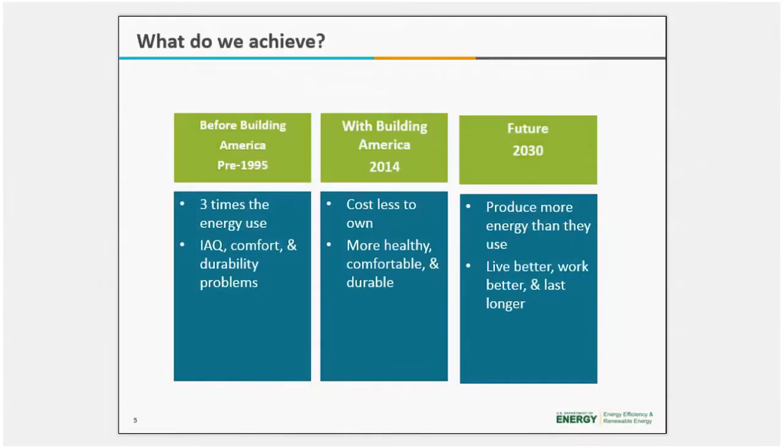With that, we look at where we've been and where we're going. For example, in 1995, a home used about 3 times more energy per square foot compared to today, and indoor air quality, comfort, and durability problems were common back then. But today, a home built to DOE Zero Energy Ready Home specifications uses less than half that energy and is more comfortable, healthy, and durable.

By 2030, though, what does the future hold? Building America will demonstrate that new and existing homes can produce more energy than they use. That is the goal.

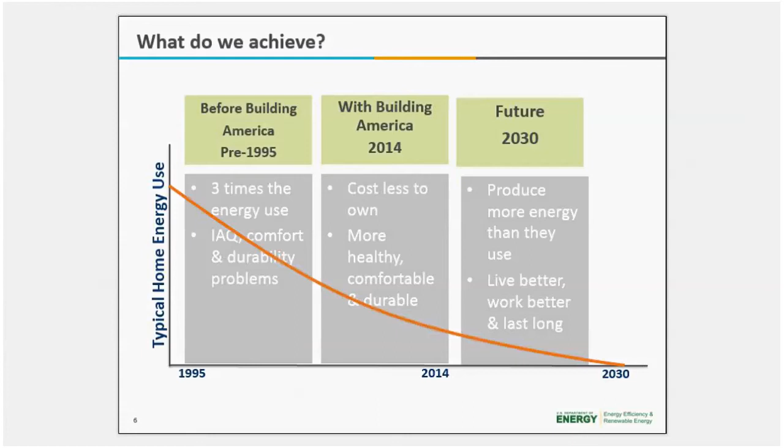So with window retrofit opportunities, it's probably not a mystery to anyone on the line that windows are a major source of heating losses. We know this, and the gains in the building can significantly drive up residential energy bills. Despite this fact, approximately 40% of U.S. homes still have single-pane windows, which are inherently inefficient and poor insulators. We have several case studies that have shown this. The presence of single-pane windows in homes has persisted over the past 2 decades, and despite the fact that approximately 30 million windows are replaced each year with higher-performing insulated windows, a large percentage of the double-pane windows replacing them are not higher-performing low-E windows, but are made of clear glass. Thus there is a tremendous opportunity here for technologies that improve existing windows' performance, such as low-E storm windows, to provide energy savings to a large segment of residences, most of which accommodate moderate and low-income households.

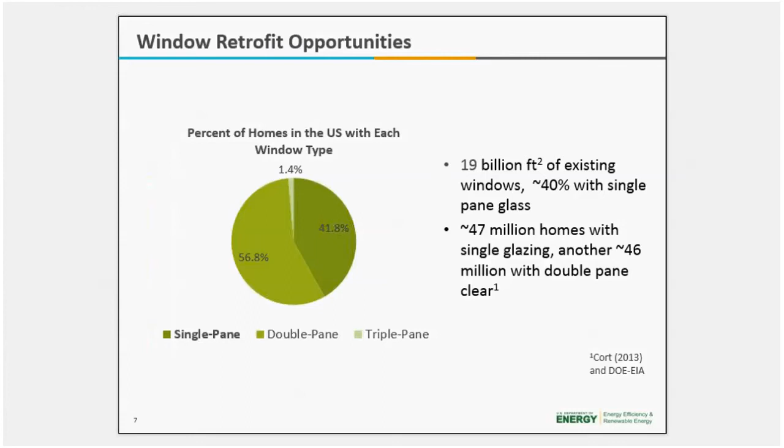So cost-effective window retrofits, that's always the big question. Are they cost-effective? DOE has been supporting technology development, market assessments, and early deployment activities of low-E storm windows, including a recent climate-based modeling effort to determine where and what types of low-E storm windows are cost-effective throughout the U.S. The results are pretty impressive, demonstrating significant savings across a wide range of climate conditions, which can be achieved cost-effectively in most regions throughout the U.S., as shown here in the climate zone map. Tom Culp is our first presenter, and he'll talk in more detail about some of these climate-based modeling results.

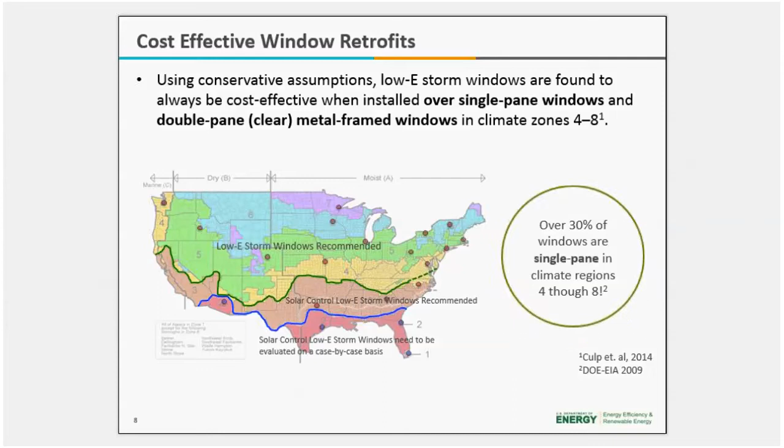So, a new look at low-E storms inside and out. Considering the amount of energy lost through windows of existing homes each year, this is definitely a remodeling retrofit area, and there is a need for a solution.

Although there are many good window replacement technologies available to homeowners, window replacement is simply not an option for many homeowners, for a number of reasons including cost and affordability, as well as aesthetic reasons for some homeowners who want to preserve the historic look of the home.

So one of the points we'd like to emphasize during this webinar is that storm windows have evolved through the years. There are a lot of people who have an idea about what a storm window is, but these ideas may very well be dated, especially the look of them.

Modern storm windows are not your grandmother's storm windows anymore, which had to be installed and removed every season, and had to be cleaned almost monthly.

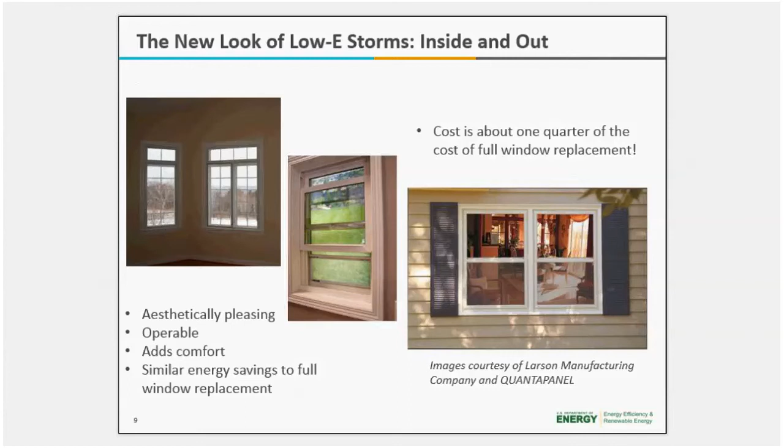Modern storm windows and interior panels are designed to blend in with the existing architecture, be permanently mounted, and are available as both a fixed and operable window. The photo on the left, the interior low-E panel, both fixed and operable, shows this. And the photo on the right shows an operable exterior low-E storm, which also includes an insect screen.

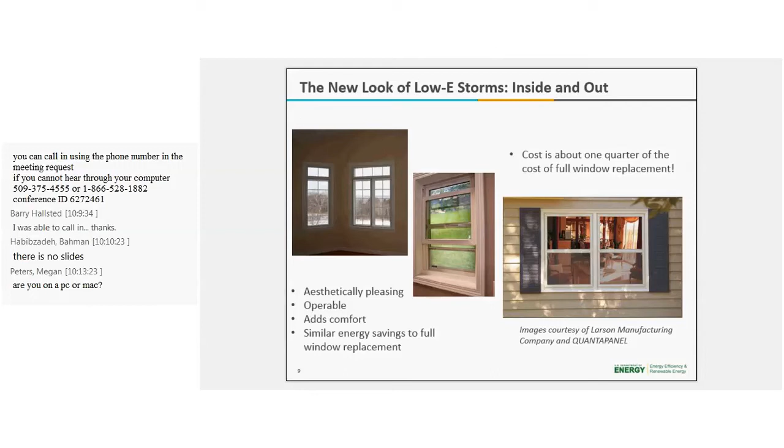So let me get into the actual presentation, and I'm going to introduce Tom Culp, who has been working with various programs in low-E storm windows for over 8 years now. He headed a DOE-funded research project from 2009 to 2013 to demonstrate, through residential and commercial case studies, the ability for low-E storm windows and retrofit panels to cost-effectively reduce energy costs in existing buildings.

He's the owner of Birch Point Consulting, and he'll be providing an overview of the technology for today's webinar: how it was developed, how it works, and he'll tell us about the field tests, case studies, and other research deployment efforts related to low-E storms. So, Tom, I'm going to let you go ahead and take it away.

All right, thanks, Pam. Hopefully you can hear me okay.

Yeah, so the technology in low-E storm windows has really been under development for almost 15 years now, and it initially started through the Emerging Technologies program at DOE. DOE supported the national labs to do a lot of testing of the initial concept, starting off with lab testing, going up to some demonstration field case studies, and I'll be talking about some of those areas.

After this technology graduated from the Emerging Technologies program, it was passed to the Building America program for in-field testing and installation guidance development, and now multiple groups are working on market transformation to make the broader building, energy efficiency, and utility communities aware of the benefits and opportunity for this technology.

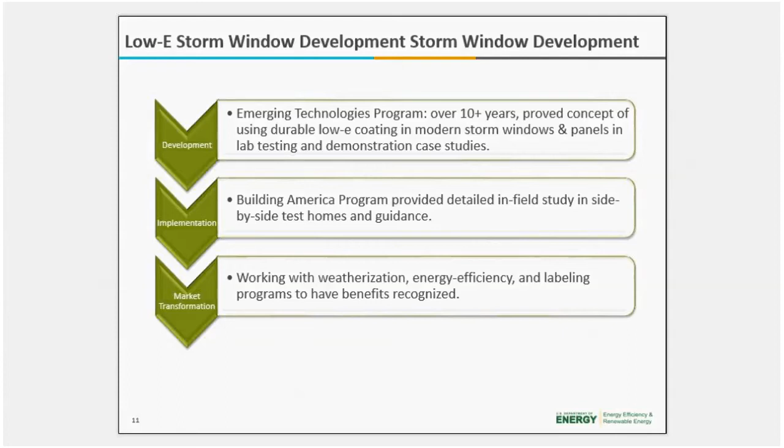But I'll start off talking about the initial concept behind low-E storm windows and some of the testing that has gone into its development.

So really, back in the 90s, Lawrence Berkeley National Lab, LBNL, first suggested this concept that a durable low-E glass coating that you would normally think about in a new window could be incorporated into modern storm window designs to create a cost-effective insulating and sealing measure for existing windows.

So really, you don't necessarily think about this as a separate window. Think of it as a way, a measure, or a tool to improve your existing window.

Now, of course, if your existing window is degraded and needs replacement, then you should replace it with the best window possible. But practically speaking, this is not an option for many home and building owners, either because of cost, historic preservation concerns, or that the existing window is fine and simply does not need to be replaced, but you still want to upgrade its performance. In that case, low-E storm windows and panels are an ideal choice to upgrade your existing windows at a much lower cost.

And it really does this in three different ways. First, it provides air sealing of the primary window. I'll talk about some case studies that have shown a 10% reduction in overall home air leakage when you add a storm window. That's not just the window itself, that's the overall home, because particularly in many of these older existing homes, and particularly with single-glazed windows, that's a primary leakage point. So addressing that area can have a significant impact.

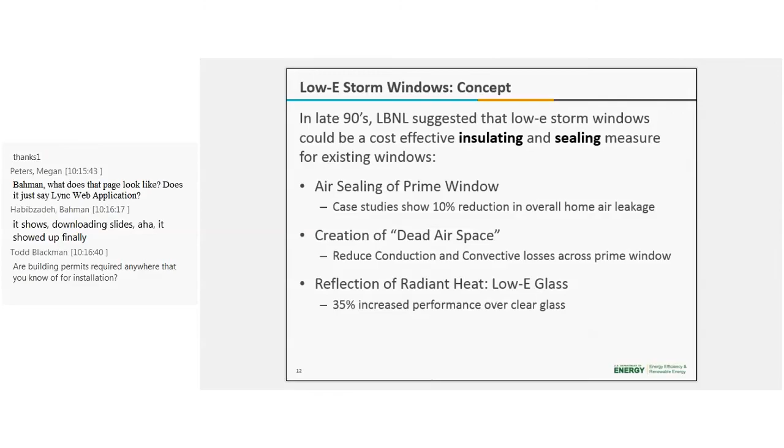Next, a low-E storm window creates a dead airspace that reduces conduction and convective heat losses across the primary window. And then third, the low-E glass reflects the radiant heat back into the home, so it reduces radiant heat loss, just as it would in the same way that low-E glass outperforms regular glass in a new window.

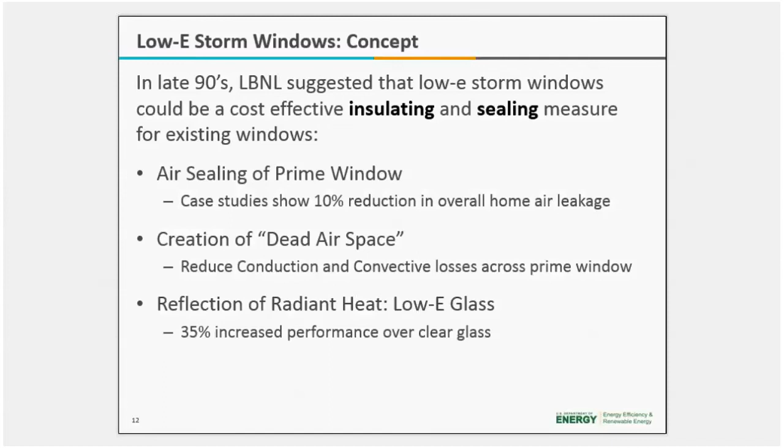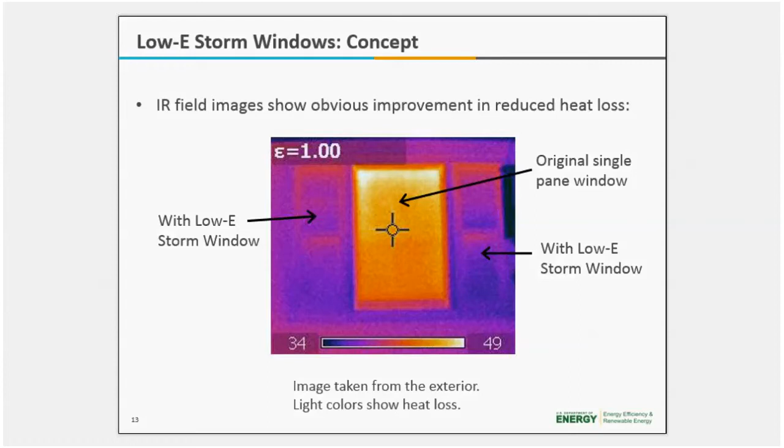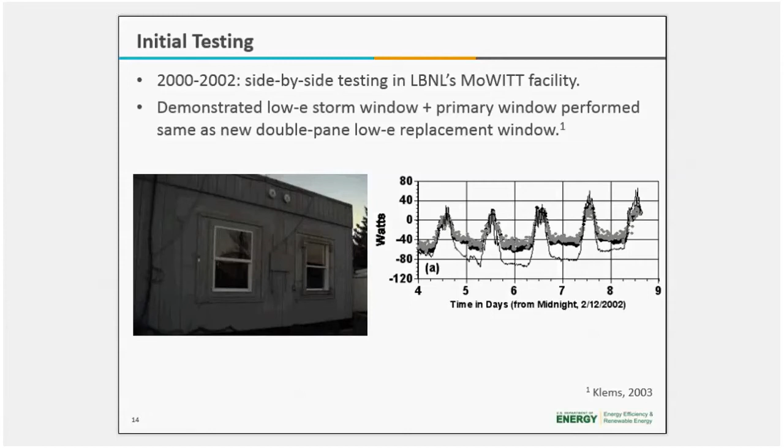Going through a bit of history: first in 2000 to 2002, Lawrence Berkeley National Lab used their mobile window test facility, or MoWITT facility, to do side-by-side detailed testing of different window options. There's more detail in this study from Joe Klems, but basically they demonstrated that a low-E storm window plus a single-pane primary window performed essentially the same as a new double-pane low-E replacement window.

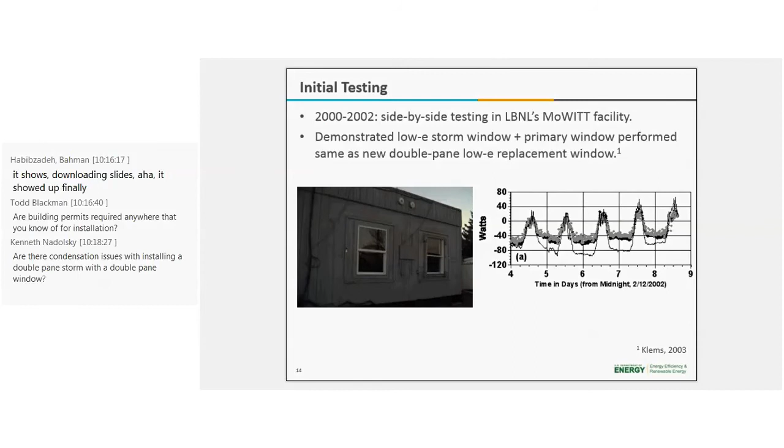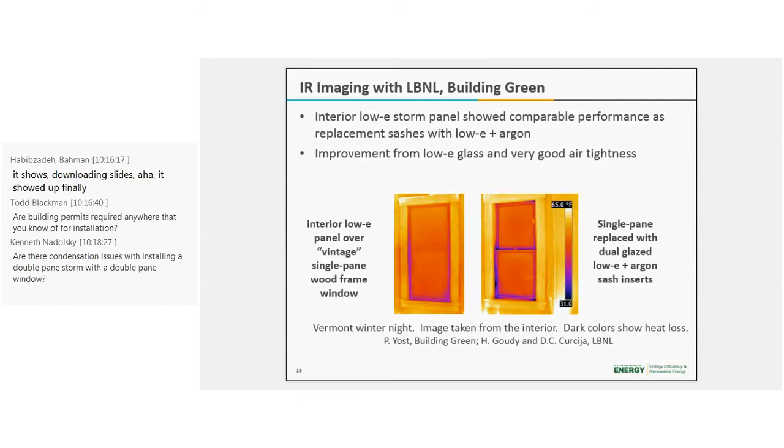Later on, LBNL did work with Building Green, Peter Yost's group in Vermont, doing infrared imaging. This slide shows a Vermont winter night image taken from the interior, where dark colors show heat loss and bright colors show more insulating performance. On the left, you see an interior low-E panel over a vintage single-pane wood frame window, and on the right, the single-pane sashes were replaced with dual-glazed low-E argon sash inserts. Visually, they perform similarly in terms of heat loss.

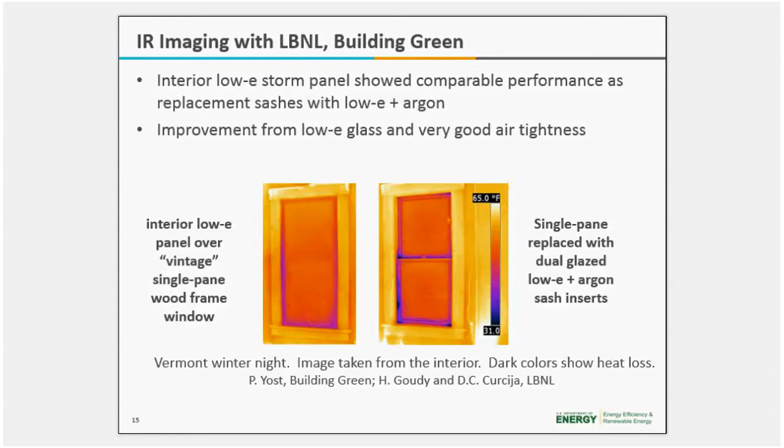So the concept, both in lab testing, looks quite positive that we can get significant improvement in performance by using both interior and exterior panels.

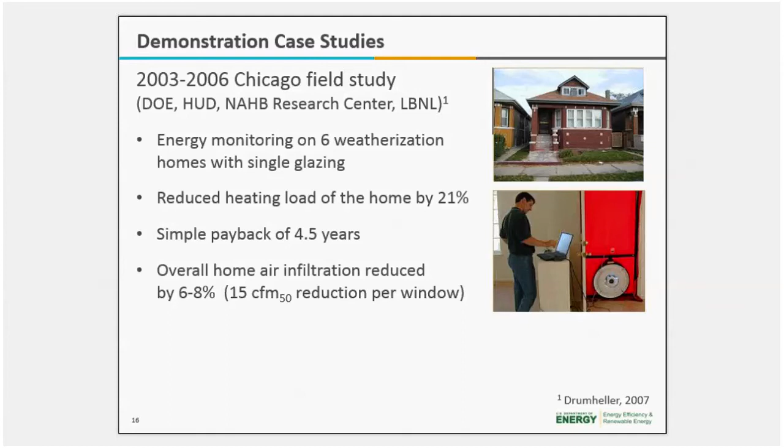Of course, in replacement windows, the payback period is considerably longer than that. Additionally, when doing blower door tests, the overall home air leakage was reduced by about 7%. That's for the overall home, not just the window, so that's actually fairly significant.

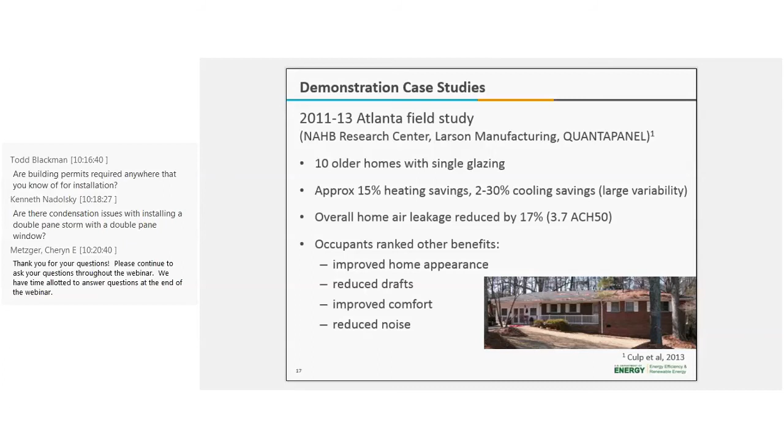Chicago is obviously a very cold climate, so we wanted to do a similar study in a more mixed climate. I participated in a DOE-funded study between 2011 and 2013, again with the NAHB Research Center as well as Larson Manufacturing and Quantapanel, where we took 10 older homes in the Atlanta area with single glazing and tested different storm window technologies.

The low-E storm windows showed over a 2-year period approximately 15% heating savings, as well as 2 to 30% cooling savings. There's large variability, particularly on the cooling side, because these are real-life field studies with variations between homes, the amount of trees around them, and real people living in them—these are occupied homes, so there's a lot of variability, but very positive results overall on both the heating and cooling side.

A little bit later on, Sarah Widder from PNNL will talk about the test studies done in the PNNL test homes, which are a more controlled environment.

On the air leakage standpoint, these homes and single-pane windows were particularly leaky, so by adding the storm windows we were able to reduce overall home air leakage by 17% just by introducing these modern-style low-E storm windows.

In addition to energy efficiency, we also polled occupants on other benefits, and they ranked these higher than energy efficiency because they're what you notice when living in the home. The number one benefit cited was improved home appearance. As Pam was saying, these aren't your grandmother's old storm windows that have to be taken off seasonally and are old and clunky—these are designed to be aesthetically pleasing, fit in with the architecture, and improve the curb appeal and dress up these old existing windows.

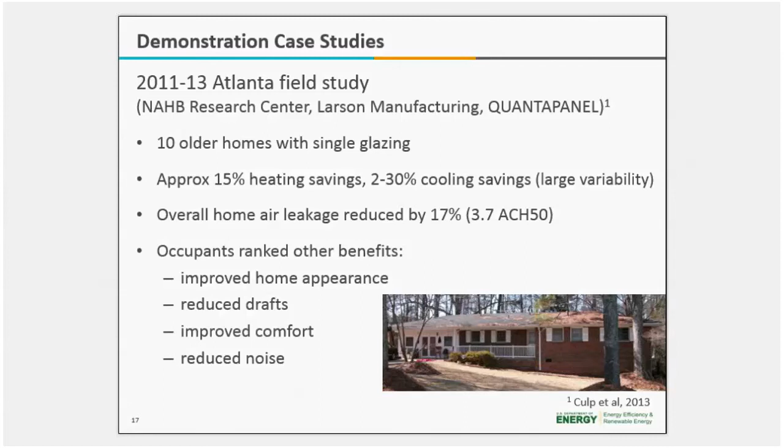In addition to single-family homes, we also wanted to test out low-E storm windows in multifamily buildings. Part of this same research study with NAHB Research Center, Quantapanel, and Larson Manufacturing, we took two older, 50-year-old large apartment buildings in the Philadelphia area. Just one of the two buildings is shown here. They're both identical, 101 apartments overall.

These had single-pane metal windows that already had old clear storm windows, but they were really poor quality, so we replaced the old clear storm windows with new modern low-E storm windows. Just by replacing those, over a year period we saw 18 to 22% reduced heating energy use, as well as 9% reduced cooling energy use, so very significant.

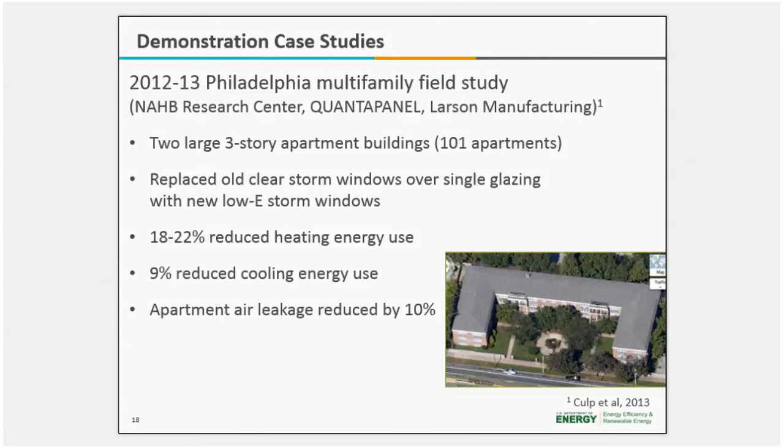We also did air leakage testing on select apartments and showed that apartment air leakage was reduced by 10%, which is consistent with the other studies. So very positive results in both single-family homes and apartment buildings.

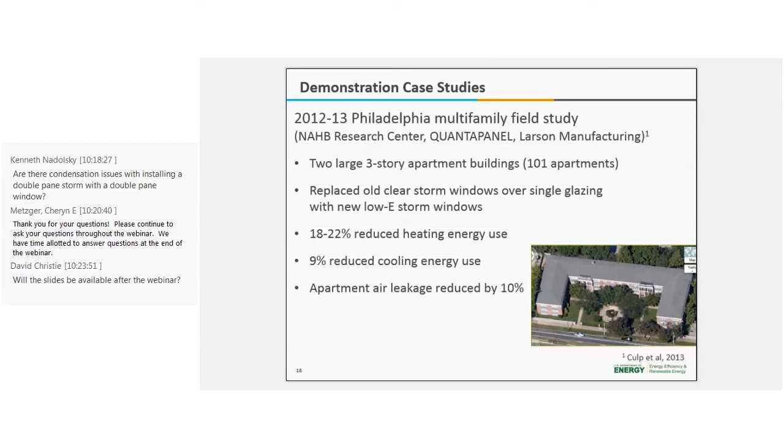I did want to mention, though, that low-E storm windows and panels are not just for low-income weatherization homes. Obviously that's one of the first targets, but they're really appropriate and a good window retrofit option in almost any building type where it's either impractical, too expensive, or undesirable to replace the existing windows. Of course, if you're going to replace the windows, put in as good of a window as you can, but in many cases it's just not practical or cost-effective to do so. In that case, low-E storm windows are a very good option.

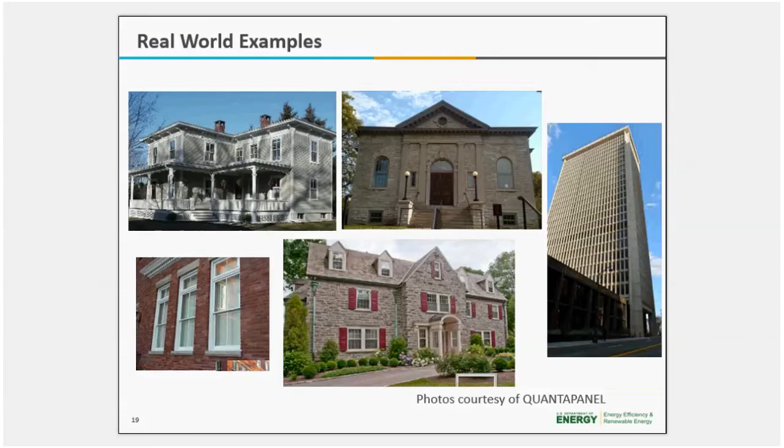As shown here on this slide, this includes homes of all types, historic buildings, light commercial buildings, and even large buildings. All the pictures here show real-life examples where either low-E exterior or low-E interior panels are being used.

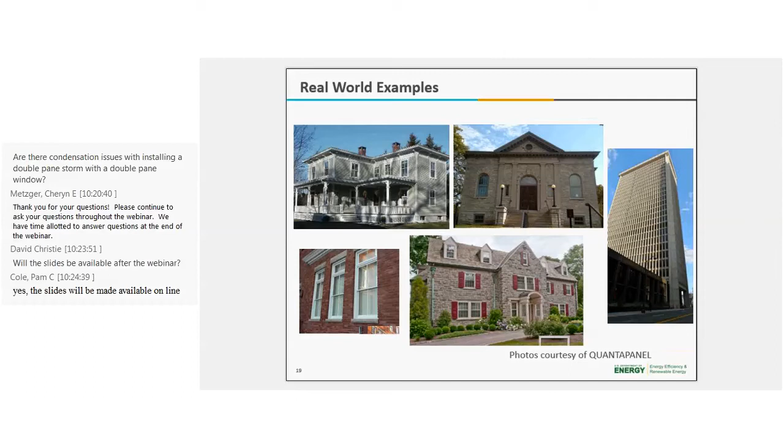Although they're really applicable to almost any building type, one of the first targets when we started to look at this is weatherization, both official government weatherization programs, but also the general weatherization market for upgrading existing homes. So back in 2009, the ability to include low-E storm windows was added to NEAT, the National Energy Audit Tool, and weatherization assistance software, used by many state weatherization programs.

Then the following year, with DOE support, low-E storm windows were added to Pennsylvania's weatherization measure priority list for single-family homes. This was the result of a needs analysis for 37 home types, covering all different home types in 4 different cities across Pennsylvania to cover the different subclimate zones.

In this case, the key output we're looking at is the SIR, or savings to investment ratio. Under weatherization programs, the SIR must be greater than 1 to qualify for that program. When we did the needs analysis, the SIR was between 1.4 to 2.2 for low-E storm windows over single-pane windows, and it ranged from 1.3 to 2.1 over metal frame dual pane windows.

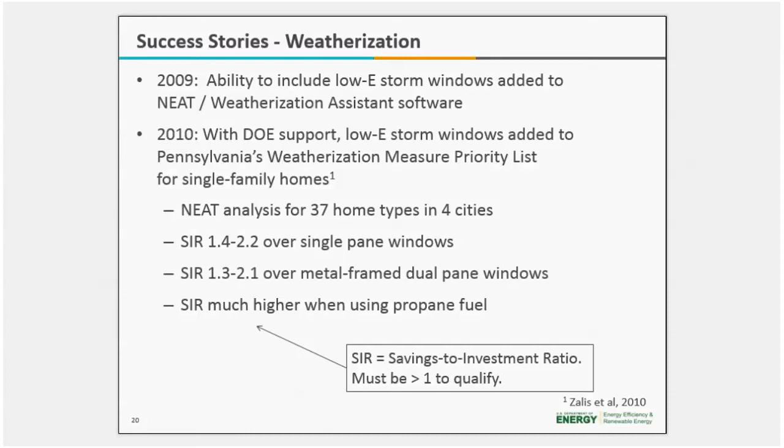The main study was done for natural gas heated homes, but when you use either propane fuel or electrical resistance heating, then the SIR was much higher than this even. So in all cases, it was proven to be cost-effective for the weatherization program in Pennsylvania, and they added it to their weatherization measure priority list.

So we wanted to, together with PNNL, expand upon this, what was done in Pennsylvania, to do a similar type analysis but for the entire country. We expanded this NEAT analysis using 39 different home types in 22 cities across all 8 climate zones that cover the continental U.S. There's a lot that went into this study.

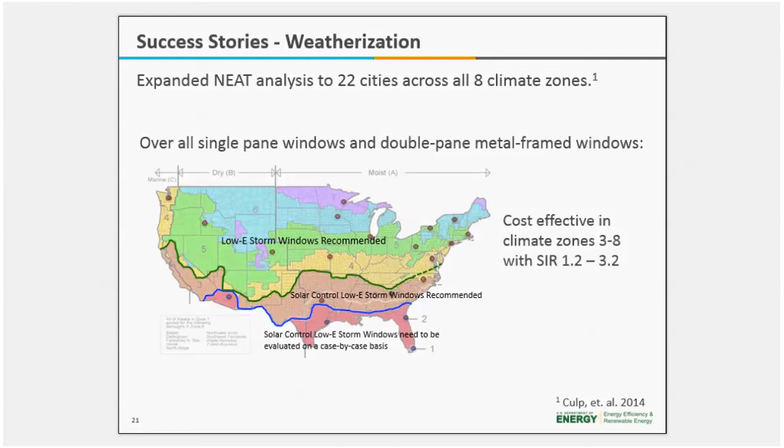We also did the test over double-pane wood or vinyl frame windows, where adding a low-E storm window or panel would then turn it into a triple low-E unit, basically. This was shown to be cost-effective in climate zones 6 through 8, as well as the eastern part of zone 5, which has higher heating fuel costs, such as Pennsylvania and New York. In this case, the savings to investment ratio, or SIR, ranged from 1.1 to 1.9.

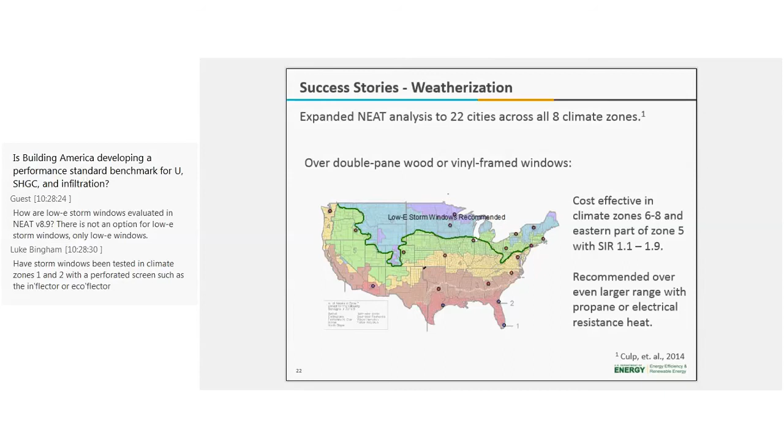And again, this was for natural gas heating, and if you do it with propane or electrical resistance heating, then they're recommended over a much larger range because those are higher cost fuels.

So taking these really positive results, both the field studies and some of the weatherization and climate-based modeling we did, one group we're working with now is the Consortium for Energy Efficiency, or CEE, which includes a lot of utilities and energy efficiency program administrators. They have formed a Windows working group together between CEE members as well as industry stakeholders to see how we can advance the uptake of efficient fenestration products across the U.S. and Canada, both efficient new and replacement windows as well as window attachments such as low-E storm windows.

One of the first outcomes of this group was the CEE window product overviews, published in February as a resource for CEE members and energy efficient program managers, that goes into detail about each of the options and technologies for addressing windows in a utility or energy saving program.

And then the next step, there's currently a couple different working groups. There's one Windows attachment subgroup that includes low-E storm windows, and in fact our next meeting will be in Salt Lake City as part of their industry partnership meetings, September 17th and 18th.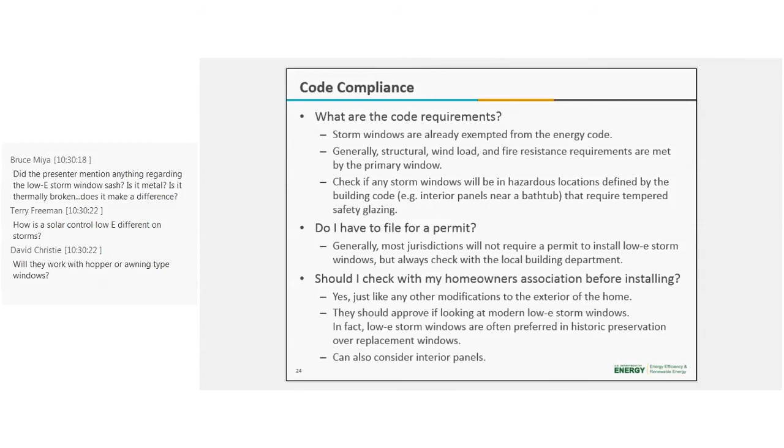Now, in general, for the energy code, storm windows are already specifically exempted from the energy code because you're improving the energy performance of what's already there. So that's a good thing, and the code recognizes that.

As for other building code requirements, such as structural and wind load and fire resistance requirements, those are generally going to be met by the primary window and building facade. So generally, it's not a concern as long as the low-E storm window or panel is not somehow adversely impacting that performance.

So really the main thing you have to keep an eye out for when using low-E storm windows or panels is to check if any of them will be used in a hazardous location defined by the building code. For instance, an interior panel installed near a bathtub or near a swimming pool - those kinds of scenarios defined in the building code require tempered safety glazing. Very easily done - you just need to specify tempered glass for that application.

Next question we get a lot is, do I have to file for a permit? That really comes down to the local jurisdiction. Our experience is that installing these panels and storm windows can be a do-it-yourself type project for a homeowner, or you can have a contractor do it. Because of that scenario, most jurisdictions generally do not require a permit to install low-E storm windows, but you always need to check with your local building department. It's really a local issue you need to check.

Third question we get is, should I check with my homeowners association before installing low-E storm windows? And the answer there is yes. Just like any other modifications to the exterior of the home, whether you're installing a mailbox or want to paint your house, you need to check and see if your particular neighborhood or HOA has any covenants. In general, they should approve it if they're looking at modern low-E storm windows. As we noted, they're very aesthetically pleasing, made to fit in with the architecture of the building. In fact, low-E storm windows are often preferred in historic preservation programs for preserving the appearance of the product. But if it is a concern or an issue, you can also consider interior low-E panels.

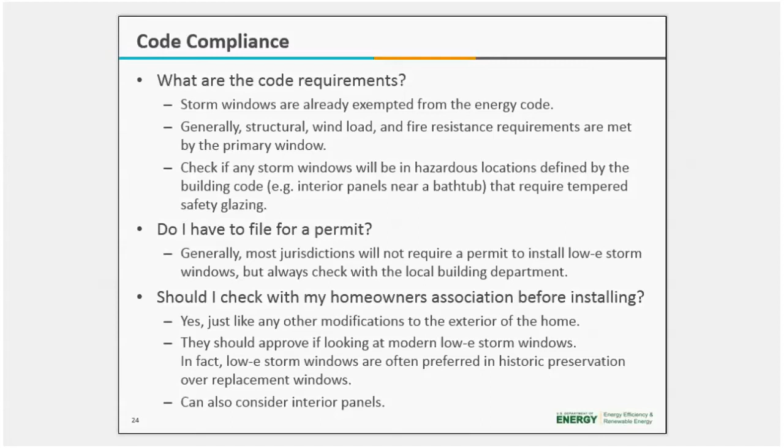So, a couple last items looking to the future before I hand it off to Sarah. Some of the other activities going forward.

Recently, low-E storm windows were integrated into the FEDS model, which then supports their use in most federal building energy audits. DOE is supporting the development of a new organization and certification and rating program for window attachments, and that work covers a wide range of products, including storm windows.

As I mentioned, we're working with CEE to develop the tools and resources for energy efficiency incentive programs. And we're also working directly with utility and weatherization programs to provide technical assistance.

Contact Katherine Cort, who's the lead on this for PNNL, or you can contact myself and Sarah Widder, and there's other people on the call. I know Carrie Haglund has been working with a group up in Minnesota, also goes by the acronym CEE, but a different group. There's a lot of work out there. Contact one of us for a lot more details.

So next, I'll hand it over to Sarah Widder. Sarah is an engineer at Pacific Northwest National Laboratory, and she's an expert who has worked in a wide range of areas related to energy efficiency of homes and buildings—not just windows, but all components of housing and the Building America program. In particular, she's an expert on the side-by-side test homes at PNNL, and today she'll be talking about some of the results there with low-E storm windows.

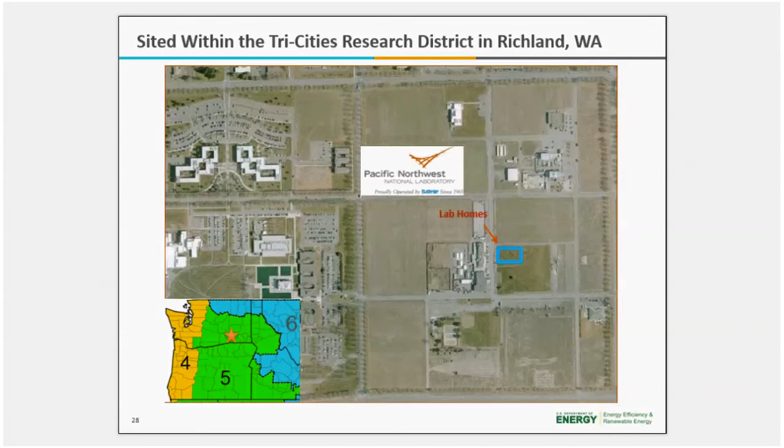So the lab home characteristics: we have two manufactured homes that were provided by Marlette, which is a manufactured housing manufacturer in Hermiston, Oregon. That was a really cost-effective way to get two pretty identical homes. We specified them a little differently than Marlette typically produces homes, so that they would be representative of more of a 1970s era housing stock that we see typically here in the Pacific Northwest region.

So you can see it has down-specified insulation levels, R22 in the floors and ceiling, and R11 in the walls. I've highlighted one thing that stands out for this experiment—the first experiment we did in the lab homes—looking at the performance of highly insulating triple pane windows. We have a significant amount of window area in the homes, and that allows us to, in a way, exaggerate the benefit or impact of these window technologies and get a better signal.

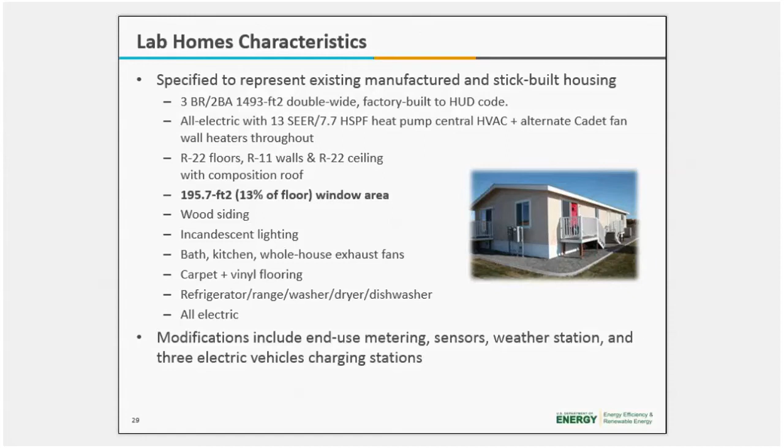This is just the floor plan of the lab homes. You can see how it's laid out. It looks like a typical home, three bedrooms, a master bath, and a regular bath.

And then I just point out these—up is south, so converse to what you might think. You can see that we have a sliding glass door facing south and then some significant west-facing glass in the dining and living room, which is also beneficial for examining how low-e storm windows or highly insulating windows can improve comfort in the home, especially with setting sun, that afternoon heat we experience in the summertime.

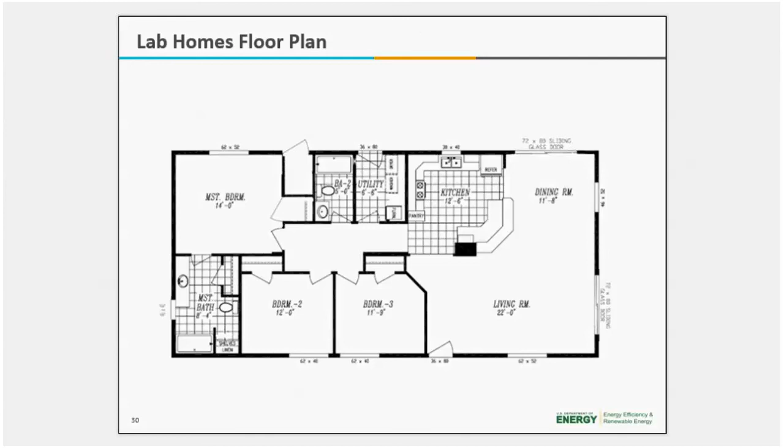These homes are also highly monitored and controlled, and that's what gives us such a precise measurement at the end of these experiments that we do.

We have commercial lighting panels as the circuit panels in the homes, so we have 42 individually monitored breakers, so we can measure uniquely almost every load in the home.

And half of them are controllable, which is how we simulate occupancy in the home. We turn on and off lighting, we turn on and off some of the appliances, and generate sensible loads within the home that are representative of people and equipment, so that we have identical occupancy patterns representative of a typical occupant in both homes.

And I know there's a lot of variability in occupancy patterns, and we could have an entire webinar about that, but the really nice thing about the way the homes are laid out is as long as we do it identically in both homes, it sort of becomes a null factor. So it's not as important that we get the occupancy itself exactly correct, as long as it's identical in both homes.

We also have temperature and relative humidity monitors throughout the home for ambient air temperature and comfort measurement within the home. We have a mean radiant temperature sensor, which is that black ball in the second picture down, and that measures sort of what a person would feel like—what the temperature next to the window feels like. It's meant to help us measure comfort.

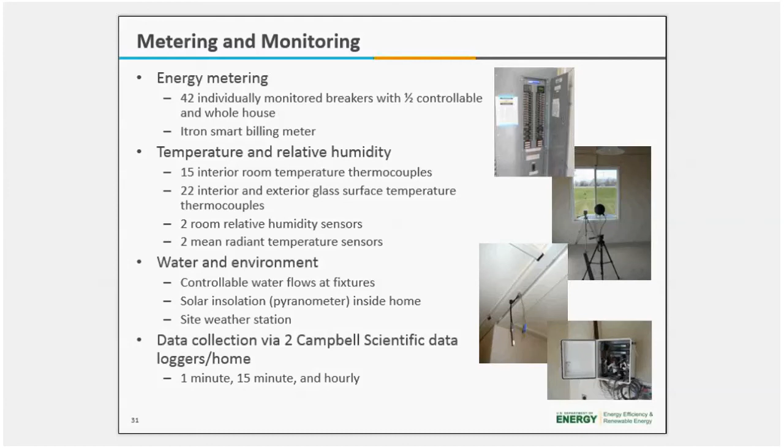And then we also have interior and exterior surface glass temperature measurements so we can look at conduction through the glass. And we take all our data with Campbell Scientific data loggers. We typically do our analysis with the one-minute data, but we collect it on a couple different intervals.

So I've talked a little bit about how the lab homes are unique. The main thing that makes this platform unique is that it has a built-in control. So we have one home that has baseline windows—in this case, we'll talk about that later, but it's clear glass, aluminum frame, double pane windows—and then another home that is identical in every way except for the one technology we're trying to evaluate.

And that allows us to precisely look at the impacts associated with that technology, and gets us a lot more causal answer than you can get in field studies. But that's dependent on how identical the homes are—we're assuming that these homes are operating the same.

And so when the homes were first sited, we did an initial building construction comparison to verify similar performance. And the homes operated pretty much as similar as you could expect, and actually a lot more similar than you would get with site-built, stick-built housing because they were manufactured homes.

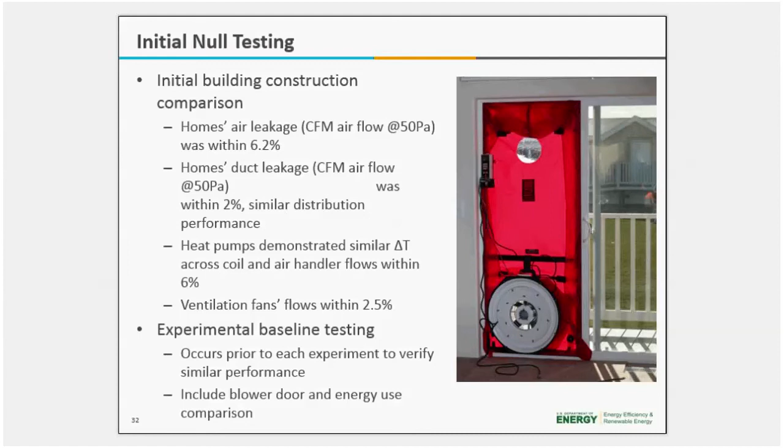And then before each experiment, we also do an experimental baseline or a null test, where before the technology is retrofit, we operate both homes for about a week with full occupancy and HVAC control, just to ensure similar energy performance before we do the retrofit. And then anything we see that is varying from that baseline performance, we can attribute to that retrofitted technology.

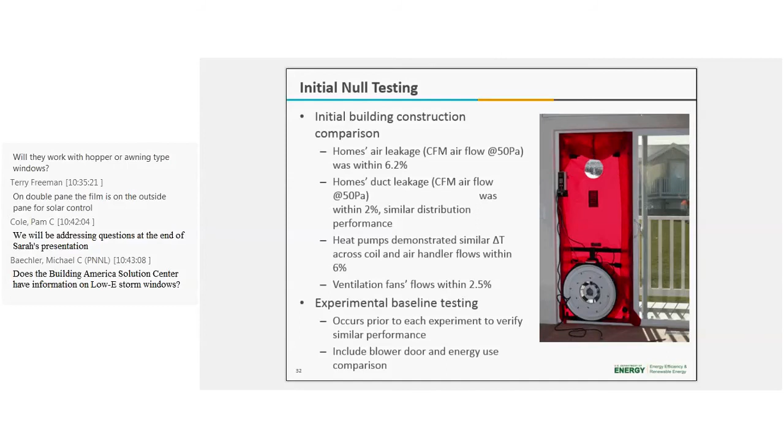So let's get into the experiment now. Here's a description of the window characteristics.

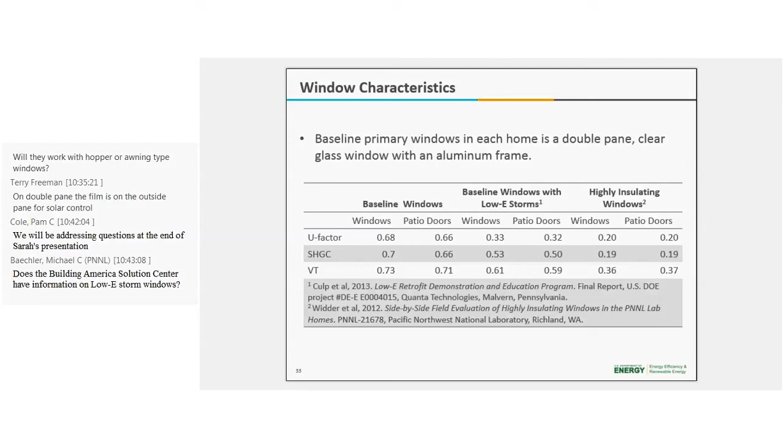The baseline windows I described were a double pane clear glass window with aluminum frame, which we have a lot of in the Pacific Northwest region for these unretrofit 60s, 70s era ranch homes.

You can see the U factor, which is a measure of thermal resistance, the solar heat gain coefficient, which is a measure of how much solar heat will come through the window and get into the house, which is beneficial in the heating season, not so great in the cooling season. And then the visible transmittance, VT, is how easy it is to see through the glass.

So you can see we had a significant reduction in U factor and solar heat gain coefficient with the low-E storm windows. I will mention that these numbers for the low-E storm windows, 0.33 and 0.53, and then the patio doors as well, were generated via modeling done by a company using LBNL's Window THERM model. They are created in accordance with NFRC testing techniques, but there's no official NFRC certified ratings available for low-E storm windows right now, which is one of the barriers to really getting these technologies incentivized in the market, since we don't have a clear way to describe their performance in comparison to other window fenestration products.

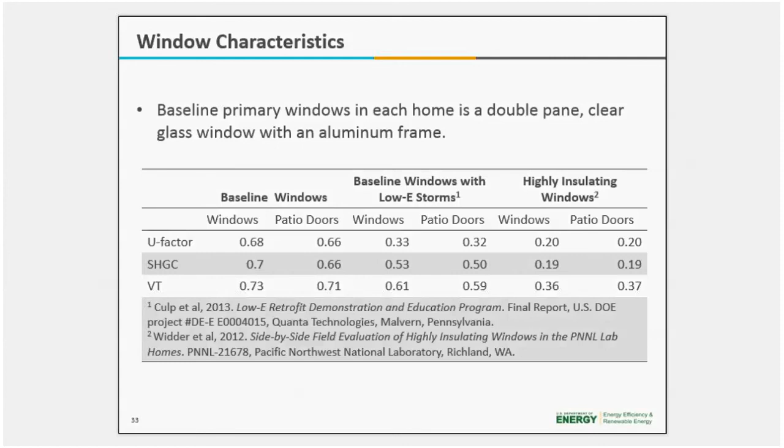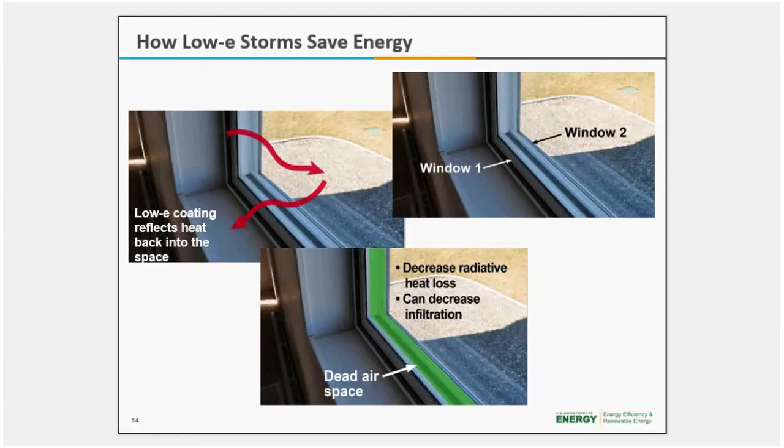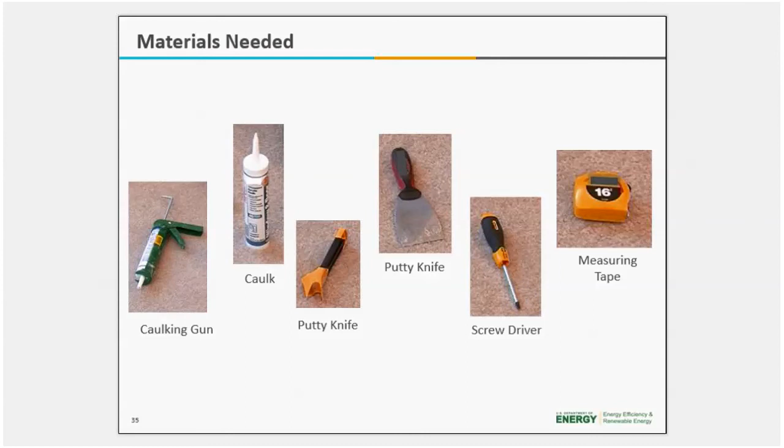Window contractors or even general contractors can also easily install low-E storm windows. This isn't a complicated technology to install. You just need caulk and a caulking gun, something to clean up the caulk. A screwdriver or a screw gun will make this even easier. And then measuring tape is probably the most important piece, actually.

The first step to specifying and installing storm windows is measuring your existing window opening. This is really probably the most important step to make sure your windows will fit properly over your existing primary window.

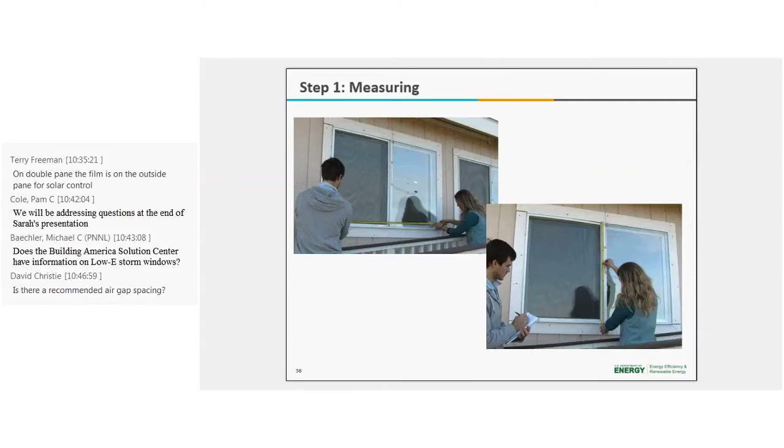This is applicable for both interior and exterior low-E storm windows. Exterior low-E storm windows can be installed in two different configurations: either an overlap installation, which is what we did in the lab homes, and we'll see some pictures of that later, or a blind stop configuration where it fits into the window opening.

Manufacturers typically have specific instructions for the dimensions that they're looking for, so follow manufacturer instructions. Windows can be custom ordered from window distributors or some big box retailers, and there's also some common sizes available that you can purchase off the shelf.

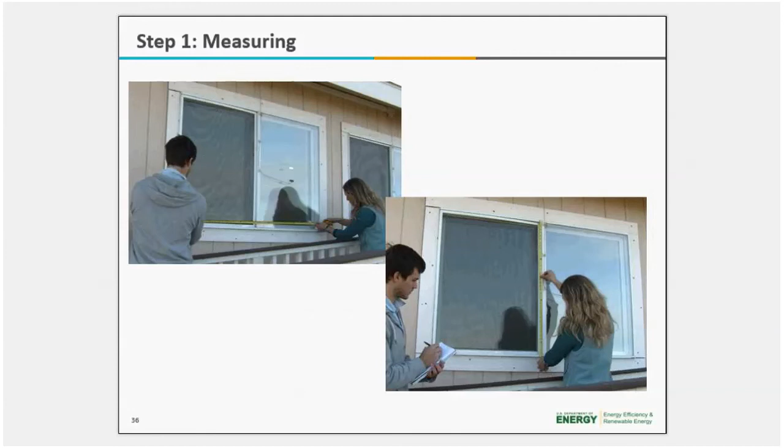So measure, measure, measure. Typically for a slider or for any horizontal window opening, you'll want to measure the top, the middle, and the bottom, and then use the smallest measurement so that your window will fit into the window opening.

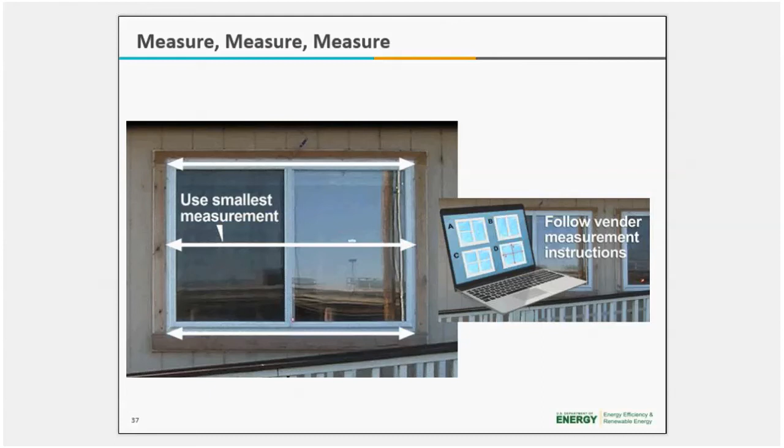For an external installation, I mentioned this is the blind stop installation type. You first want to dry fit the window, so hold the exterior window up to the window opening and make sure the screw holes are all landing on solid wood.

You want to make sure that the storm window and the primary window both open in the same direction. That'll make it easier to use and increase the permanence of the installation. Then just take the window down, caulk around the opening, put the window back in place, and then screw in.

You only want to caulk along the top and sides of the window opening. Don't caulk the bottom. Exterior storm windows have weep holes designed into the bottom. They have a little plastic gasket on the bottom to help make sure that bottom edge is as airtight as we need it. But those weep holes will help with drainage if any condensation should occur between the primary window and the exterior window.

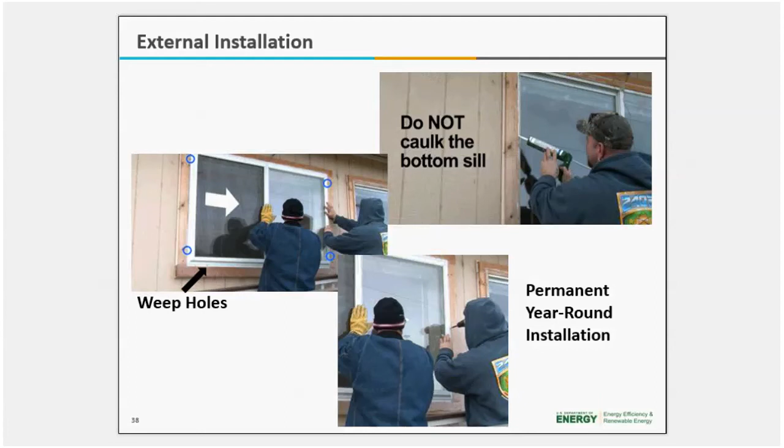For an interior installation, the process is very similar. Interior windows are only available in the blind stop installation type, and you'll typically have a trim piece that goes between the primary window and the interior low-E storm window to ensure a good thermal break and sufficient gap. You can see in the upper right corner the screw holes that will be in the low-E storm window frame for an interior window in a blind stop installation.

You can see the contractor installing it in the lower left window. You also want to make sure your low-E coating is facing the right side for both interior and exterior installations. Sometimes manufacturers put stickers on them, but the sides also feel different. You can rub both sides of the window, and the side with the low-E coating, which is a pyrolytic coating, feels squeaky. If you run your fingers on it, it'll squeak and has higher friction.

The low-E storm windows don't have weep holes, so you want to caulk around the whole opening, because they're meant to be the primary air barrier. So if condensation, particularly from inside generated moisture, is a concern, an interior low-E storm window might be something to consider.

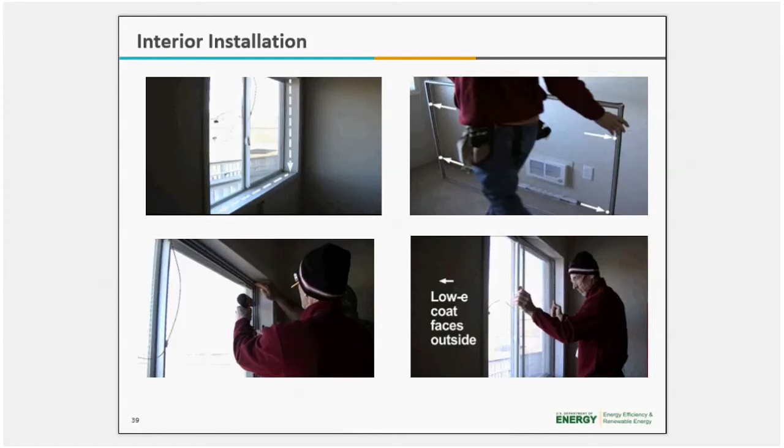So the results from our lab homes experiment showed an average of 10% whole house energy savings from the low-E storm windows, compared to 12% from the R5 triple pane windows. That's really significant savings from a pretty cost-effective technology. I've shown just the average daily energy savings here. Those are extrapolated from our seasonal measurements using a heating degree day extrapolation. We've also generated some energy models to corroborate those numbers using Energy Plus, but these are just the heating degree day regressions.

You can see we saw, for the low-E storm windows, better savings during the heating season, the winter, than in the summer. That was the opposite in the highly insulating window experiment, where we saw better savings in the summer because of the low solar heat gain coefficient.

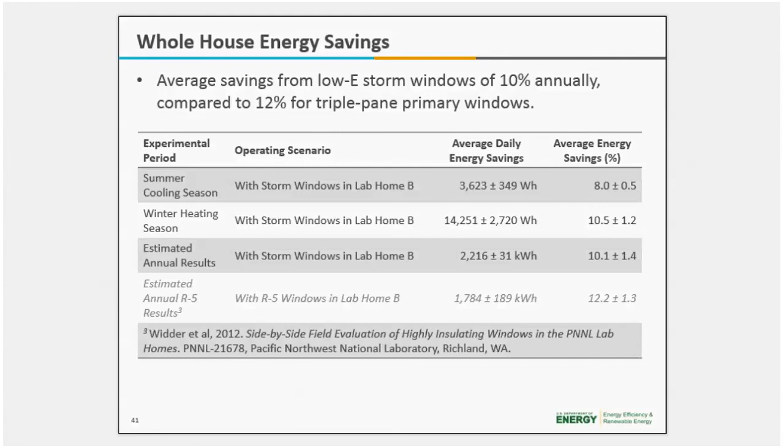We also measured the air leakage performance of the low-E storm windows, and did some sensitivity blower door testing, shown in the table, to figure out which window was our primary air barrier for the lab homes experiment. For us, the primary windows in the manufactured homes - manufactured housing in general has a reputation for being pretty airtight, because there's a lot better quality assurance that can be done on a manufacturing floor than out in the field when you're building a stick-built house.

These primary windows were in a new manufactured house. They were pretty tight, and they were our primary air barrier. So those energy savings numbers we saw before, 10%, could probably be improved, since those are really just from the improved thermal performance of the low-E storm windows. We're not really getting a lot of benefit from decreased air leakage in our experiment, which probably wouldn't be the case in the field.

This table, I'll spend a little bit of time describing it. Lab home A, that first line that's italicized, is just showing the comparison for a baseline. That's our unmodified home, so we're just showing how similar Lab home A and Lab home B are. You can compare that first line to the second line, where both the primary window and the storm window are closed, and we did not seal the bottom edge of the storm window.

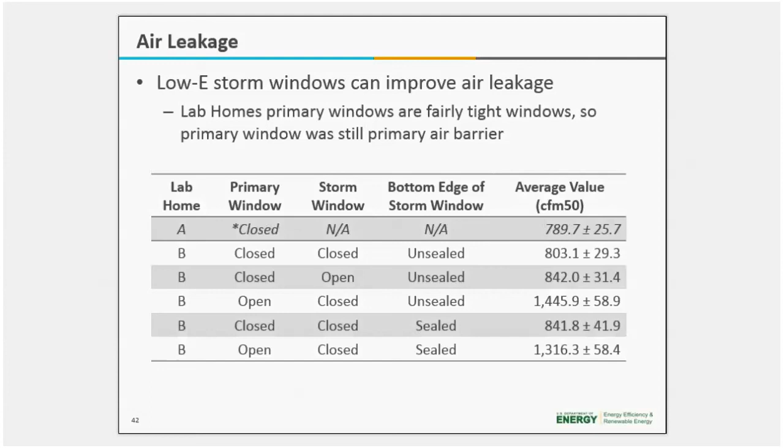So the other thing I'll mention about the energy savings performance that we saw in the lab homes for the low-E storm windows is that for the heating season, the majority of the savings occurred on sunny days at night, when it was the coldest outside.

You can see that in the graph on the left. The blue line is Lab home A, which has the baseline windows. The red line is Lab home B, which has the low-E storm windows. We're also seeing the outdoor temperature on the right axis and the dotted line. You can see there's more difference between the red and blue line in the morning before the sun has risen, and then it separates again in the evening.

On this sunny day, we didn't see a lot of savings in the middle of the day. If it was cloudy, we have graphs similar to this on cloudy days, and we see that difference maintained throughout the day.

And then in the graph on the right, this is the summertime, and you can see the maximum amount of savings is achieved in the afternoon period when it's the sunniest and the hottest. We wanted to note that this is coincident with a lot of peak power periods that utilities experience. So similar to a lot of efficiency or shell measures, this can also be a way of decreasing some of that peak energy use in the summertime.

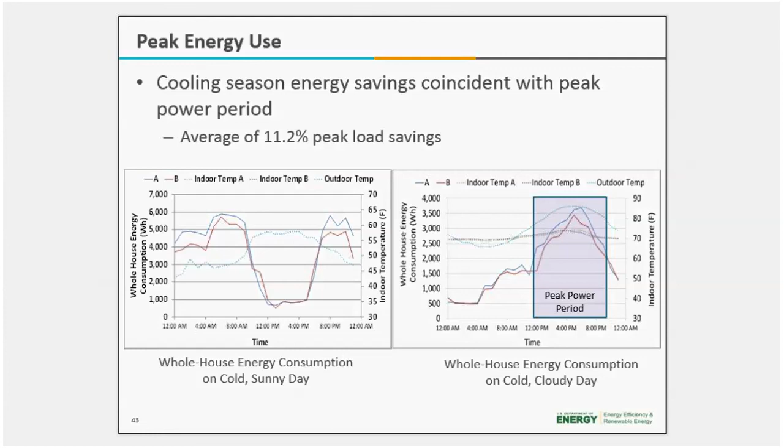It's not that replacing your windows is a bad idea, but people replace windows for a lot of reasons that are typically not tied to payback or energy savings - for health and safety reasons, a lot of times for aesthetics or improvement of home value. Sometimes people do it for comfort reasons, but it's typically not driven by an energy or cost effectiveness calculation.

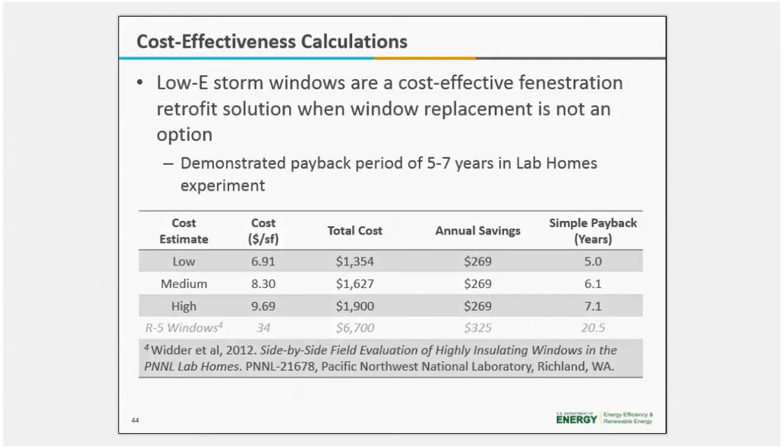There's also many of those reports and a lot of other information available on the Building America Solution Center. For those of you that aren't familiar, it's a database of energy efficient home construction techniques and technologies. It provides really specific installation guidance, including climate-specific recommendations, code requirement information. It has videos and CAD drawings. It's a really great resource for utility programs, for builders, for contractors, on how to properly install technologies that can help decrease energy use in homes.